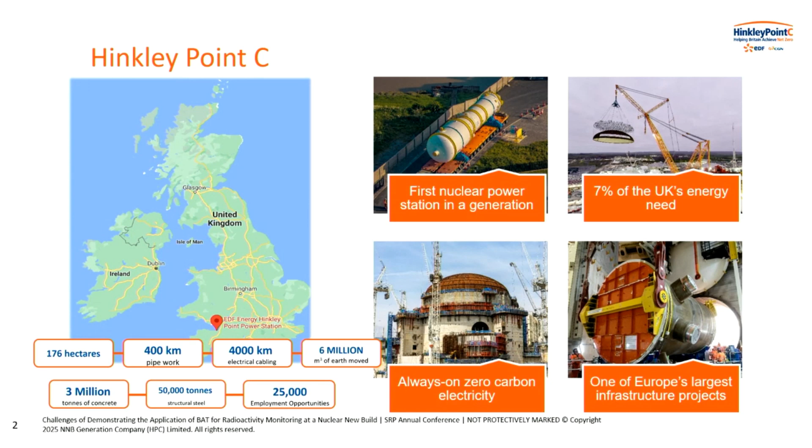So I'm hoping you can see some of the examples on the screen to try and give an idea of the scale of the project. We've also got some recent images, including the installation of the first civil reactor pressure vessel in over 30 years, just highlighting some of the quite remarkable progress that's been made to date.

Thanks, Stefan. As an environmental professional, one of the things I love talking about - and I appreciate I'm probably preaching to the converted here - is just to recognise, and it's built into the poster that's going to be downstairs as well, the carbon costs and things like that.

That's not to say we don't need those other renewable sources as well, but I have to be honest, it kind of gets my goat a little bit where all we hear about is renewables as being the answer to low carbon. It's not. Nuclear has a really important role to play within that.

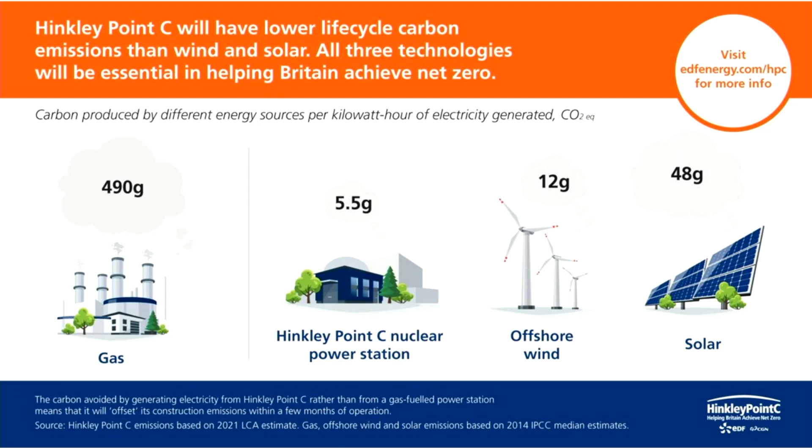Okay, so before we get into the bulk of the presentation, I just want to provide a little bit of context on best available techniques, or BAT. I'm aware this will be familiar to a lot of you, but maybe just as a reminder - there's a legal requirement in the Environmental Permitting Regulations for all exposures of ionising radiation to the public as a result of radioactive waste disposals to be kept ALARA, considering social and economic factors. But if you're going to dispose of radioactive waste, you need your RSR permit, and that has within it specific conditions to address that BAT requirement, including on the topic of monitoring.

So when we say 'best', at a high level we mean most effective at providing a high level of protection of the environment. In terms of 'available', we really mean developed and accessible under economically and technically viable conditions. And when we talk about 'techniques', we're not just talking about technology, but also the design, the operational methods, and the management systems. So if something is considered to represent BAT, environmental optimisation is being achieved, and implementing further techniques could lead to being grossly disproportionate.

So that's BAT. In terms of radioactivity monitoring at a nuclear power station, there are three types from an environmental RP perspective that I want to talk about. That's in-process monitoring - your real-time or near real-time monitoring of the levels of radiation during operations.

As a new build project, we went through a generic design assessment process. We were fortunate in that we had a reference plant, Flamanville 3, our sister plant out in France. I appreciate for those involved in SMRs, you may not have that - there's always these kind of different challenges.

But we were building the EPR on an evolutionary design based on French OPEX, but then having to align that to UK requirements, but within a local site context.

For example, things like our reference plant has a 98-metre stack because there's a big cliff behind the site and they need to make sure they've got adequate dispersion. We don't have those situations at Hinkley, so suddenly we're now looking at a shorter stack height because of kind of planning considerations and visual impact.

We then need to look at realigning all of the sampling arrays within that stack to make sure we've got appropriate and representative samples. And there you're trying to balance across the varying, conflicting, competing requirements of various codes and standards, making sure you have sample lines as short as possible, whilst maintaining you're taking a sample from a representative location and having your instruments at a safe and secure location which are easy to access. And those do conflict, and those don't always kind of align neatly.

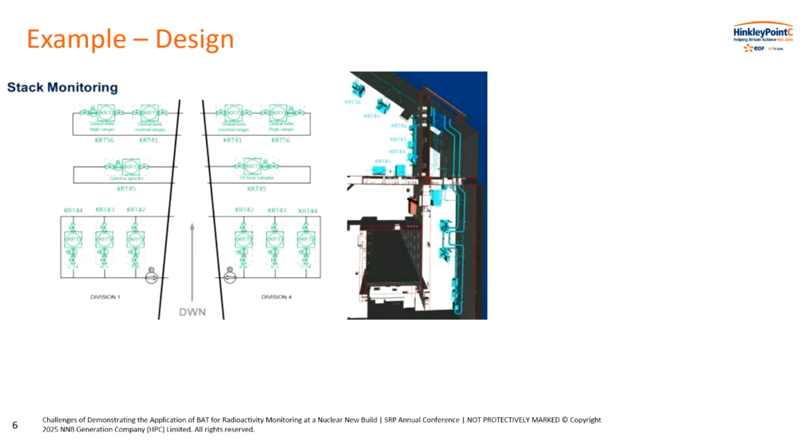Making sure that we've got duplicate sampling systems as well - you see here we've got two separate sampling lines. We did have a challenge during GDA about whether we should have a third separate line for regulatory compliance sampling. But there were challenges around how do you maintain that, whose responsibility is it to maintain it - is it ours? But we've just got the two lines.

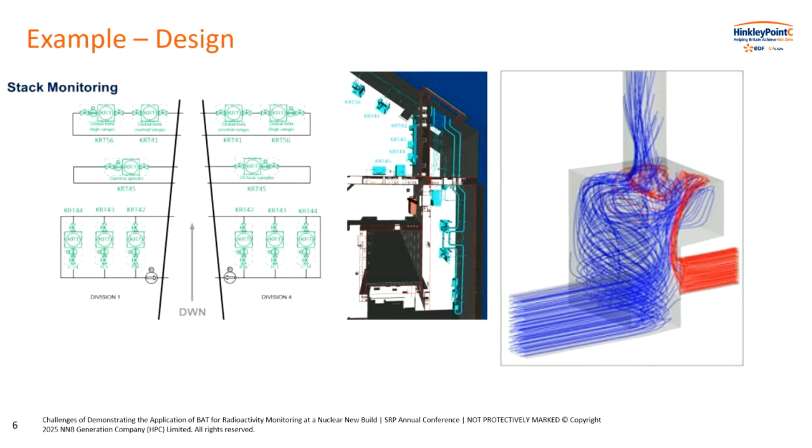Thinking about the stack height, there's loads of changes that happen during the design process. So looking at computational fluid dynamics to make sure we understand the flows that go through that plenum into the stack, looking at what that means as you go up through the stack - where are we going to be taking samples, what are the right heights. And with all these things, there's never a lovely inflection point on the graph where it's easy to choose - you're having to make these kind of engineering judgments.

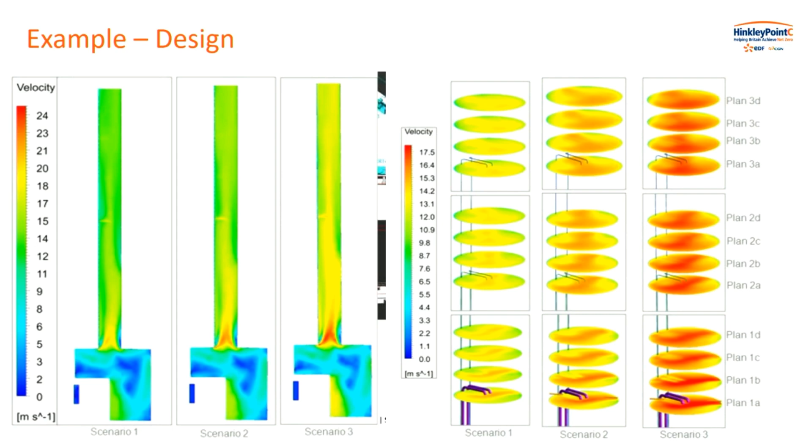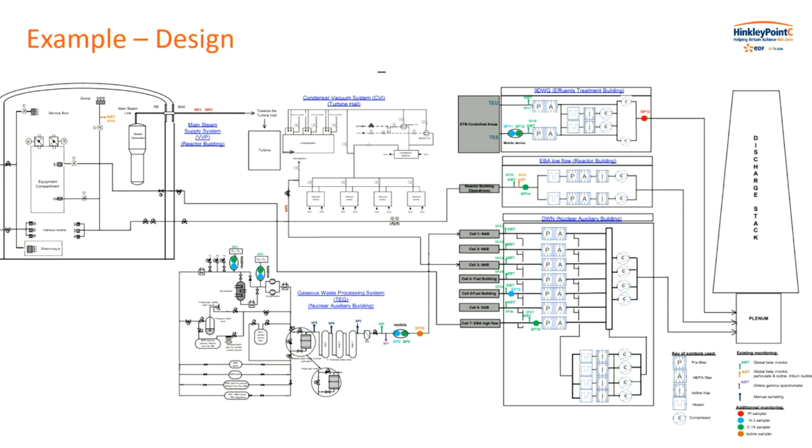When we think about it in terms of the entirety of the plant, stack sampling is actually relatively straightforward, relatively well known and understood. We're actually in a position where we had to demonstrate BAT across the entirety of the plant, across all of its in-process monitoring, all of its discharge monitoring at various different locations. For that, we're very much dependent upon the implementation of codes and standards, making sure that through their application we're demonstrating relevant good practice, because you've got so many other things that you need to consider.

So when it comes to thinking about how you move from a design into a procurement environment, I have to be honest, when I started on this project, I was probably quite naive in the world of procurement.

Thinking about what Stefan was saying in terms of what does BAT actually mean, well the A in BAT means available. I assumed that Hinkley Point C, a multi-billion-pound project, we were the biggest show in town, and people would be lining up waiting to sell us their wares. How wrong I was. To give you an indication of technical specification for our plant radiation monitoring system, about 180 detectors across the site.

Some of those are nuclear safety classified. The technical specification only runs to 119 pages. However, when you go into that one section which says references, there are 164 different references referring to codes, standards, engineering notes, internal guidance, procedures, those sorts of things. And that's one of 48 appendices of the contract.

So when I tell you that when we put this contract out we had one bidder return a bid, that may not come as a complete surprise to you. It doesn't matter how good a piece of equipment is, if that tenderer doesn't give me a compliant tender I can't award it, or even if they don't apply for it I can't give them the piece of work. It doesn't matter how good the X, Y, Z piece of equipment is - if I haven't bid for it, it isn't available. So the availability is fundamentally quite difficult and is quite a different kind of context.

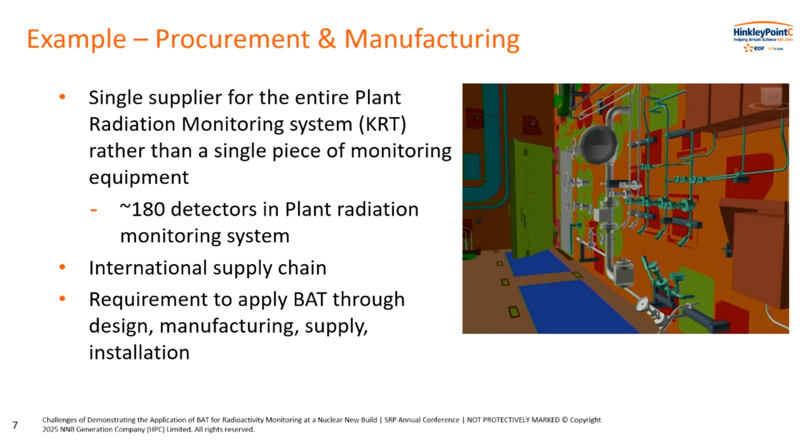Because throughout all of this we're now in the process of looking at manufacturing non-conformances, exemption requests, deviations, contract variations. So actually even our original specification that we laid out in tablets of stone, we're having to manage all of those changes as part of this and still continue to demonstrate the application of that. And I suppose the last point is then doing that installation within a complex environment where you've got loads of other challenges as well in terms of human factors and those sorts of things.

Okay, so construction then, as you'd imagine, an extremely complex phase. So unsurprisingly there's a vast number of mostly minor changes and non-conformances during that site construction. That can range from non-conforming concrete to defects on a weld on pipework, but you do need to assess the impacts of these changes and non-conformances in a proportionate way. That's the key thing - making sure that you've got that proportionality. If you gave full BAT analysis to everything, well you're not going to build anything, are you?

So it means focusing on areas of importance because you have to consider that displacement activity. If you're over there, well you can't be over there, which is probably where you need to be.

So for example, at Hinkley Point C we'll have 8 rather large discharge tanks, circa 1,000 cubic meters, so pretty big. Their primary functions are to store, provide a containment function for that effluent, but also to sample it prior to discharge to the environment. Now one of the key environmental design requirements was to have smooth internal surfaces, limit the number of internal components so you could minimize that particulate, and ensure you had representative sampling.

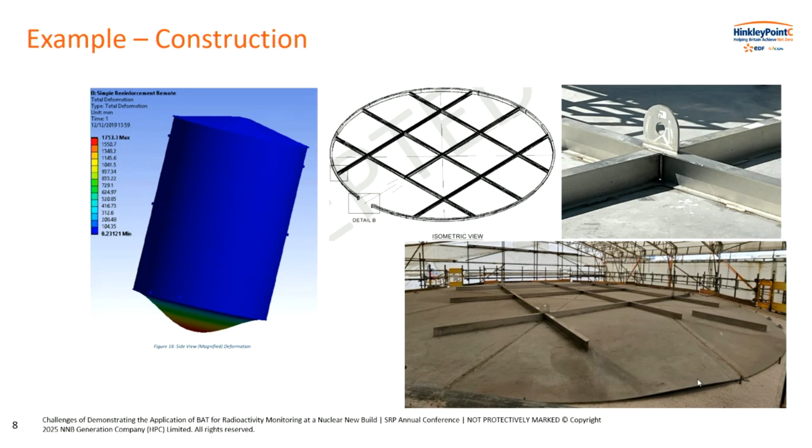I think we can all agree no one really wants that. The key thing to remember is that a tank needs to be a tank. So while we're trying to reconcile this against the environmental design requirements, fundamentally a tank needs to contain the effluent. It's also worth considering that the dose to the representative person from discharges from Hinkley Point C is about 5 microsieverts a year, about the same as a dental X-ray.

Pre-operations - I say pre-operations because Hinkley Point C isn't an operational station yet, will be soon hopefully, but the planning and development of the operational arrangements is underway. The approach we'd typically take to demonstrating that is to consider regulatory guidance, make use of the invaluable operational experience and relevant good practice from the operational fleet within the UK, but also in France.

We also consider particularly relevant sites. Hinkley Point B shares a local environment, Sizewell B has more similar reactor technology. But there are instances where UK guidance is entirely appropriate for the existing fleet, but it may not necessarily be aligned to other relevant good practice internationally.

For example, when developing our environmental monitoring programme, we were considering how we would monitor dose rates around the site boundary. UK guidance recommends the use of TLDs - it's a tried and tested, proven technology. It consists of putting a TLD in a bag and nailing it to a post.

Perhaps there are more sophisticated options out there. Well, in fact, we already had one at Hinkley Point C. The plan will be for emergency gamma plume monitoring that we would install gamma tracer detectors around the site boundary anyway. It enables live, or close to live, reading of data. They're much more secure and they've got increased data granularity.

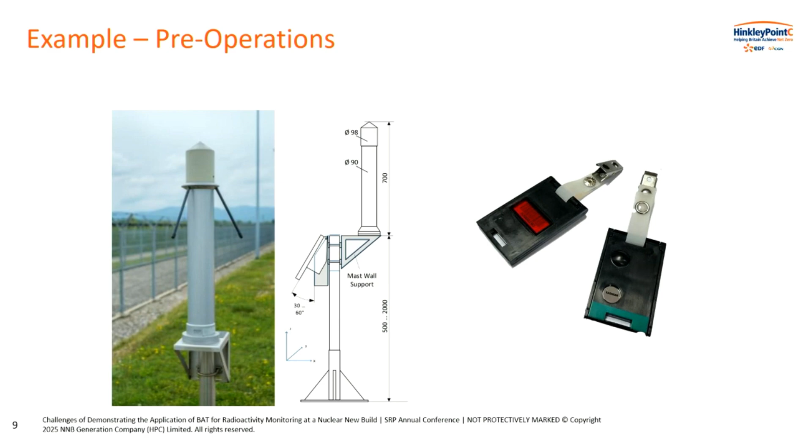Just very conscious of the time, and I've probably got about a minute to wrap up. As Stefan said, radiological impact from Hinkley Point C is very, very small. Another way to look at it is that if we were a coal-fired power station, the doses from our normal discharges of gas emissions would be higher than a nuclear power station. That's how low they are in routine operations.

We need to make sure that we're monitoring those things, but we need to make sure that our monitoring is also proportionate. So the requirement for BAT still applies, but it needs to be implemented in a proportionate way. I'm not saying our challenges are any harder than retrofitting, they're just different. It's all quite difficult, and I think the earlier presentations we saw from Sellafield in the earlier session illustrate some of the unique challenges they face, and SMRs will have the same challenges as well without a reference plant.

We've taken the view of leaning on codes and standards as being a particularly useful way of doing that and pulling on our available OPEX. But you need to be really careful about not cherry picking isolated clauses out of different standards to try and do that.

If you're following a standard, you need to make sure you're following it as holistically as possible. And there are those challenges that I say you can't just look at the design. Ultimately, BAT is about how you implement that, how you maintain that, how you manage those changes. And that's really, really crucial. To be honest, the biggest issues we've got at the moment at Hinkley is making sure that design we've so carefully pored over actually is realised in all three dimensions as it's built on site.

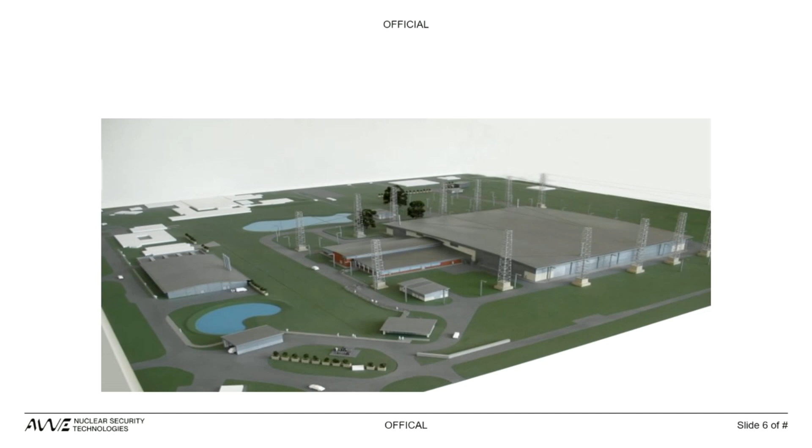Now, as time's passed, the number of projects has grown, obviously. That is a picture of the Mensa facility, which will be assembling and disassembling the weapon. That is a nice picture of the Hub, with the engineering wing, the science wing, and right at the top is the calibration facility.

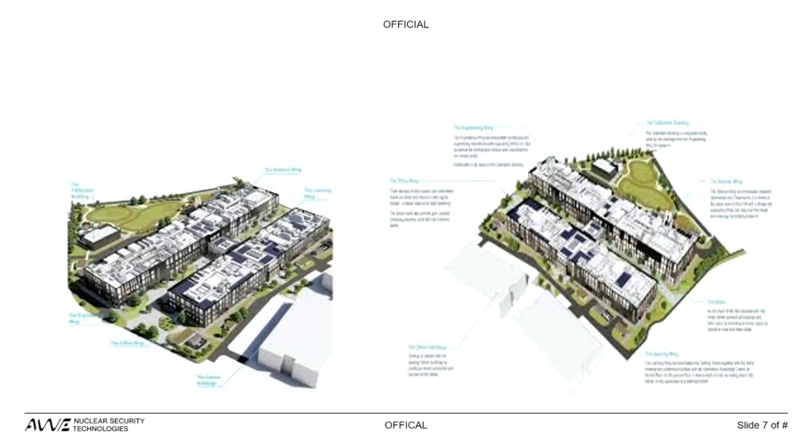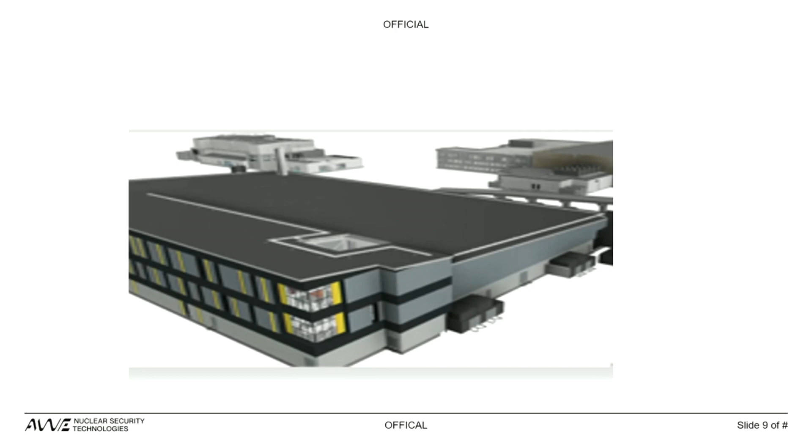In terms of the framework, we've got IRRs, REPPIR, EPR, the AWE assurance principles. We're also drawing on IAEA standards. But what we've actually set out years ago is our design safety principles, which basically says this is what we consider to be good practice for a modern standard building. So we've got a good idea of what we're going to do, nailed down in writing.

I don't know whether anybody's aware of this, but there is something called the ARC project - the Alpha Resilience Capability Project - where BAE Systems, ourselves, and Sellafield are all collaborating to try to maintain the skills, knowledge, and technology to keep alpha awareness and standards going. Because most of the industry, you could argue, deals with beta gamma emitters - it's not really, but maintaining that alpha scale, if you want to call it that, is key for the ARC project to go.

One of the things we're finding out as we go along is people are using COTS, commercial off-the-shelf equipment, and RGP as buzzwords, like 'oh, it's COTS, it's RGP' and it's like, well, hang on a sec. Drill down and try to understand what you're trying to put across, because at the end of the day you still have to demonstrate it's ALARP. Not many people can build a furnace that withstands 1,000 degrees centigrade, for example, and you can't go to Argos and get it.

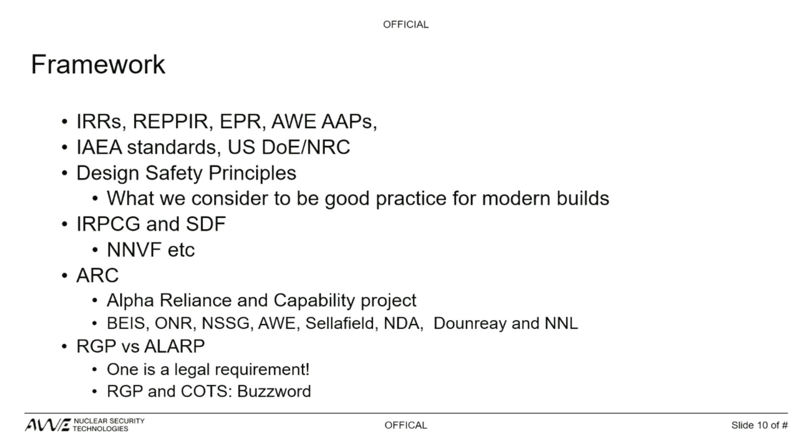As everybody's mentioned, there's a distinct age profile across AWE staff, not just ourselves, but across engineers, safety case writers, etc. One of the things we decided early on as a company is we'll use the intelligent customer approach. When our engineers have been getting involved with the design engineers, there's been some butting of heads, because they've assumed, or we've assumed, we've forgotten how to do stuff, and in reality we haven't. There's also the fact that AWE has a different safety culture and an ALARP culture. So when the guys have come down from Sellafield, they've said, 'yeah, well, that's just C4 area,' and we're going, no, we don't have that system anymore. We've stopped doing it. So there's been some education going on.

So one of the things I've got is a new build team, which is a combination of experienced people and newbies, as I call them, and I'm also getting trainee placements. The idea is that when the next generation come along, they'll know what we're doing. They'll have some experience of how we got to the place we're going, the journey that we're on. So it allows us to support the future.

Anne's doing a presentation about how we're recruiting. Basically, it's a 2-year program to become a health physicist, and approximately 3 years to become an RPA. So there's lots of placements, lots of ideas that we're trying to maintain to keep the skills capability up to address the wide variety of hazards we're dealing with.

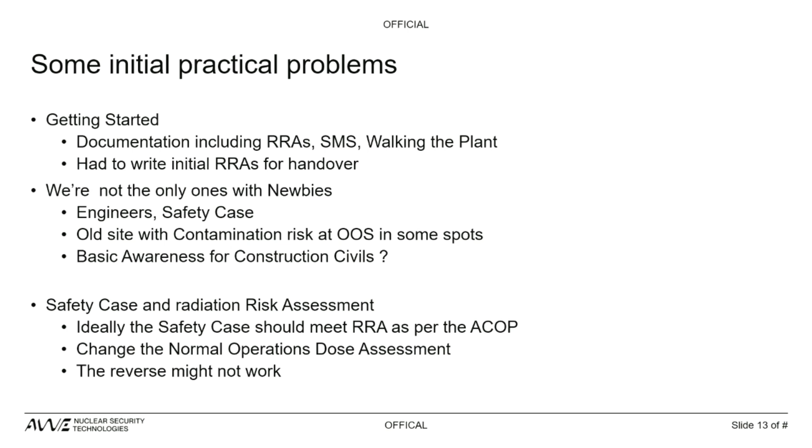So this is going to be a generational thing. A large number of people at the start of the project are going to disappear off the project. They're going to get jobs elsewhere, as we discussed earlier. So it's about capturing the ALARP arguments and the ALARP journey of how you got to where you got to, making sure the design and operation is holistic, so you can maintain the plant and decommission the facility at some point, with a plan for a through-life refit.

So, I've been given a blank piece of paper. We used to, and still do, use RPE a lot because we've got a whole historic plant where we might find contamination. But one of the aims I'm trying to do is reduce the RPE reliance.

One of the things I was thinking about when constructing this presentation was that one of our inputs into our ALARP culture is the concept of zero intakes, which helps us reduce our waste arising by applying BAT. If you're not contaminating people or the building, your waste is essentially out of scope. But unnecessary use of RPE can also be a problem, so you need to demonstrate that use of RPE is ALARP - for example, looking at the totality of the problem: heat stress and all these other issues we know about.

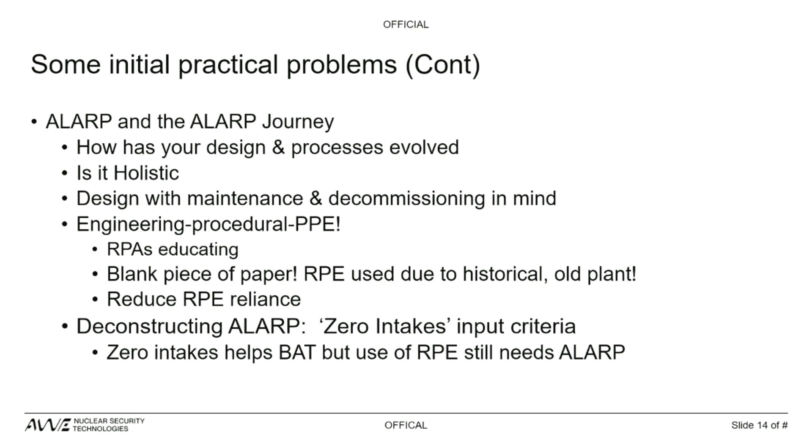Now, not many people make glove boxes, so we won't be the only company that wants them. The Americans want glove boxes. The guys at Sellafield want glove boxes. Everybody wants a glove box. And it's a single point failure.

I don't know about you guys, but I still use British Standard 4094 on X-ray and gamma shielding. Now a lot of people, like the Cerberus guys, do MCNP, MicroShield, etc. So one of the things we've got to look at is how we do the oversight, because some of the guys are extrapolating on the curves and models in those British standards using least squares fits. So one thing we might want to look at is whether we need a British Standard update.

Instrumentation is another bit of an issue, because as we're designing, instrumentation goes out of date. So one of the things our colleagues in the instrumentation section and our QPs are looking at is a configured list of instrumentation that we keep reviewing - is this still current, what's the life, how's it going to work, is it going to fall over? They're doing a lot of good work for us to try and keep things happening.

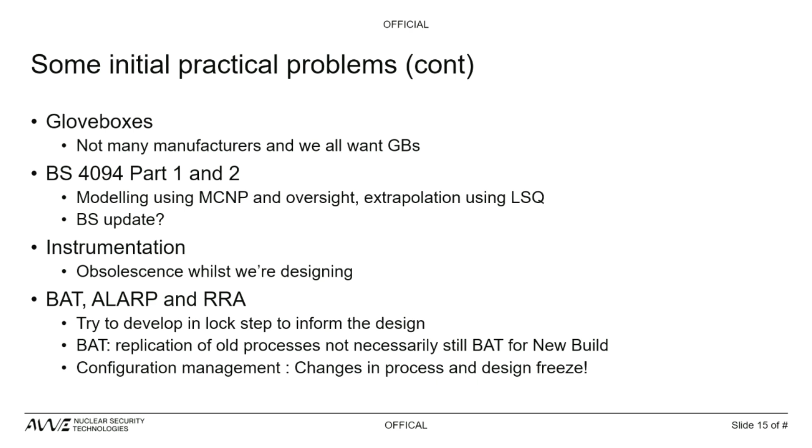One of the fun things about working with the AWE scientific community is, as they keep saying, the science always evolves. So for various buildings, we're going to give people a design envelope to allow for scientific changes, because it has been a bit irritating when people turn around and say, 'John, we want to change this little bit of a process,' and I'm saying, 'No, hang on - we're trying to build something. Let's have something called design freeze where we can actually build the things we're trying to build.'

Done a lot of discussions, and I did a presentation to the IMechE on how we vent systems and things like that.

One of the things we've been working with the RPAs on is, could we come up with a simple standard for air sampling? For example, a gentleman named Stuart Fannin many years ago came up with a model using very complicated mathematics to say, what about one sample near a containment less than a metre away? So you could do that.

Now, having had discussions with engineers, one of the things they've been looking at is use of computational fluid dynamics, because you can use computer programs to model the airflows. But it's prone to what the Americans call garbage in, garbage out. So if you put a mistake in while doing the model, you won't get the right model.

So one of the things we're looking for is doing it in a practical way, saying, right, we'll round up our RPAs, vent engineers, the safety case guys, the qualified person, facility management representatives, and go, right, this is where we want the cams to go. Basically doing it practically, we think the airflows are going to be here.

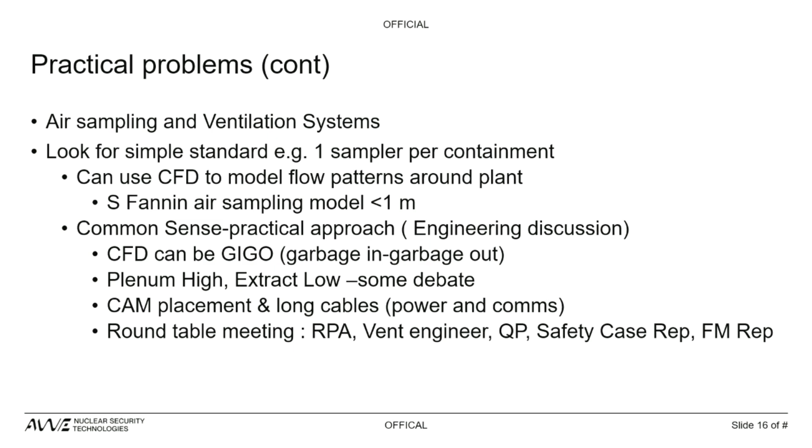Now, we've moved away from paper, which is a good thing in a way. So a lot of the builds are using 3D drawings and model walkthroughs during the layout. And slowly people are actually using virtual reality to look at how these buildings will operate.

But one of the ideas I had was, well, what about a sim facility where you have sim surveyors monitoring sim plant, sim maintainers maintaining the plant? You could have a computer program like SimCity, but you can trial stuff to see if it is maintainable.

Here's some examples of what we're trying to do. Now, some of the things AWE has decided to do is we will try stuff. If it doesn't work, at least we've demonstrated it doesn't work.

So I did some modelling and calculations. I found 4 centimetres will give about a factor of 2 dose reduction, which based on the ALARP argument I was generating was about all I need. We took the final design through MCNP modelling, which gave good agreement.

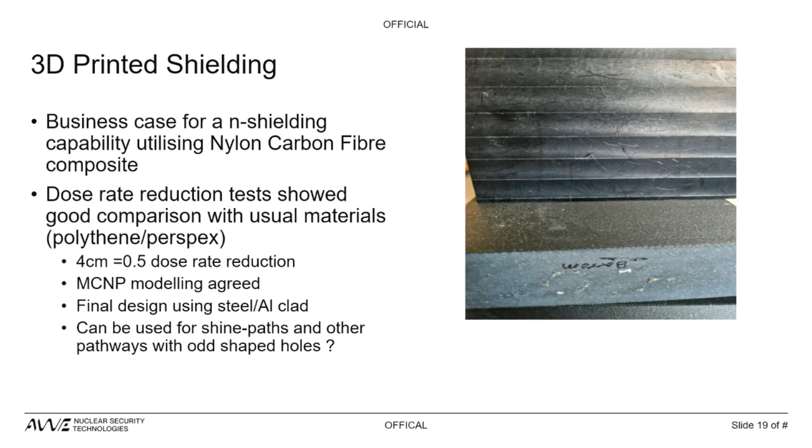And one of the things in discussion with various people is, well, if you can do 3D printing for metals and plastics and things like that, you could use it to plug odd-shaped holes in things like radiography facilities and all these other good things, rather than just put a big piece of wood over the top of it.

Now, many years ago, I was working on obsolescence with our QP. One of the things we said was, wouldn't it be great if we could have the CAMs and the criticality detection system linked up to various locations around site so we could look at data in real time from the facilities? As time passes, our new instrumentation will be smarter, so it will know where it is and plug into building management systems.

My colleague Graham Old bumped into me and said, I've had a chat with our QP, Trevor Burkett. What we think we can do is link the CAMs to CIDS to laptops, because since COVID we've all been given a laptop each. So one of the things we could do is, while you're in the office and there's a problem in your facility, look it up and you're already looking at the problem rather than going to the facility.

Now, many years ago again, some gentlemen asked me to... one of the things we've been looking at is UV to see if we can detect box holdup.

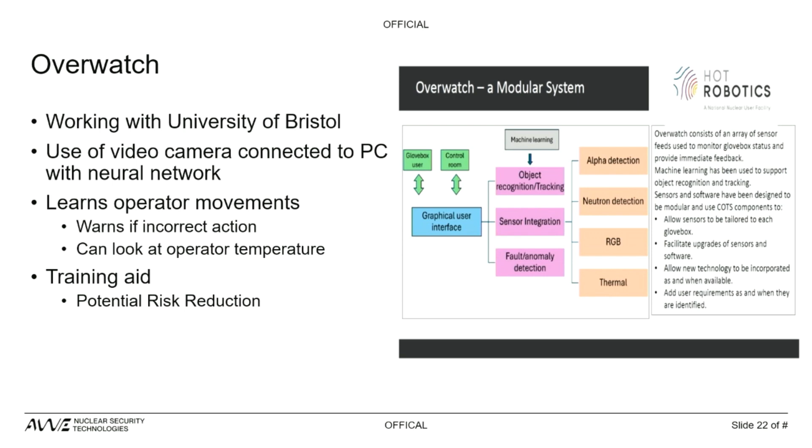Thanks for everybody getting involved, and for everybody I forgot from the list - for example, Daniel West for teaching all the engineers that depleted uranium is actually radioactive, and the guys at Cerberus for doing some shielding calcs for us. Thank you very much.

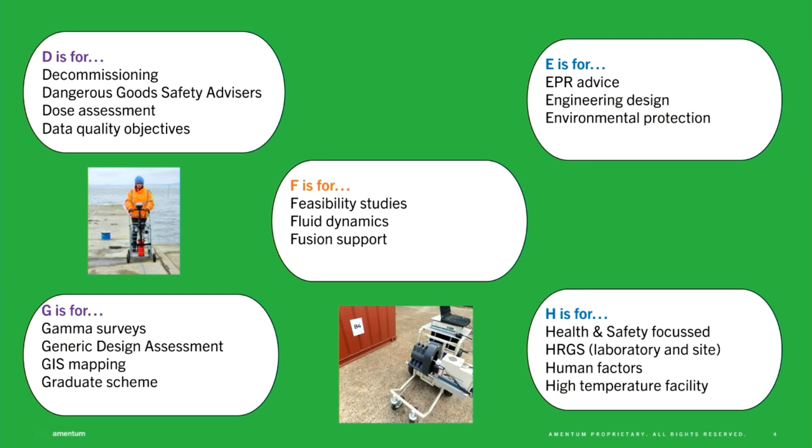We're very health and safety focused. We have high resolution gamma spectrometers in both our laboratory and out on site. We do human factors work, and we have a high temperature facility. We do lots of innovation, I hope. We've got a lot of instrumentation. We do IRR 17 advice, and we've got an irradiation facility in Harwell.

We used to be called Jacobs, our most previous name, which might be more familiar. K was quite hard - we've got lots of knowledge at expert level, and our team does like a Krispy Kreme donut. We've got low resolution gamma spectrometry systems as well - it's a picture of one that we had on site there. We do leak sealing, mathematical modelling - these are some of the codes for the ANSWERS suite.

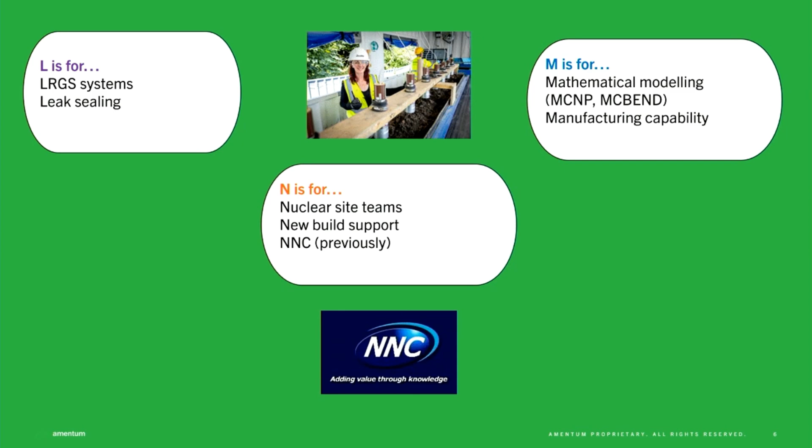We've got manufacturing capability, we've got nuclear site teams. We do new build support. We were previously called NNC. We've got offices in lots of locations. We do project management, problem solving, and we offer personal development. We do, I hope, quality work.

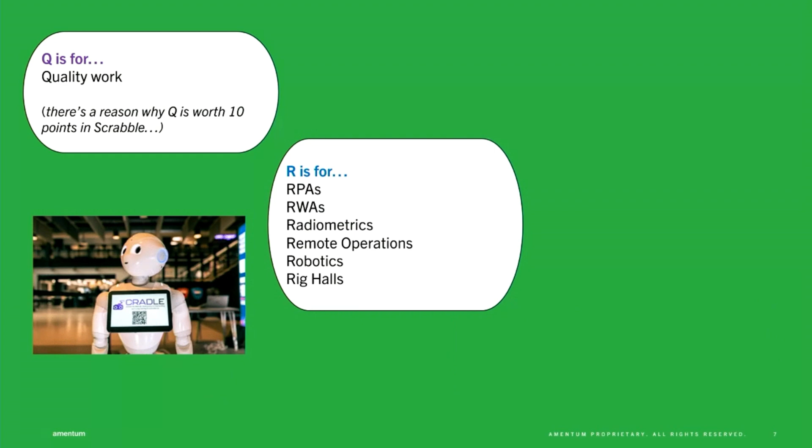R was a bit easier. We've got RPAs, RWAs, we do radiometrics, remote operations, robotics, and we've got some rig halls. We do safety case work, a lot of site work, and we've got SIAL, which is used for waste immobilisation. I'd like to think we've got a lot of talent and we're really good at teamwork. We offer training courses, and I've been there for 21 years.

We've got a UKAS accredited laboratory. We do a great variety of work, including visual sample planning. We were previously called Wood Nuclear. We offer waste management, and we can facilitate workshops. We are X-ray experts, hopefully.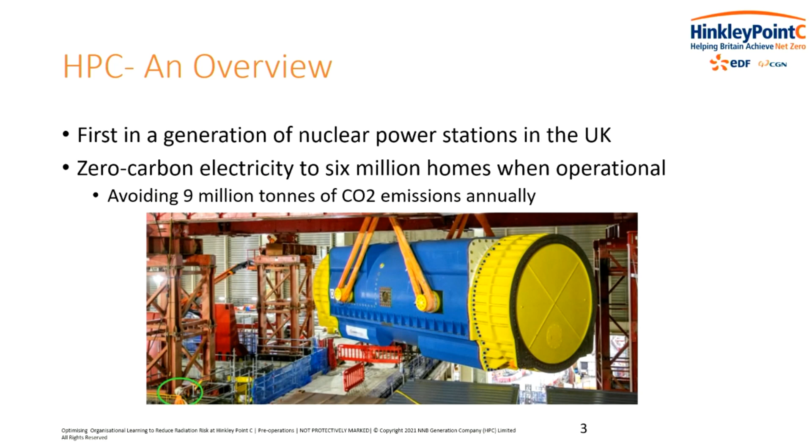Before we discuss organisational learning, we'll give you a brief overview of the project itself. As you're probably aware, it's the first new nuclear power station to be built in the UK for around 30 years. It will generate a huge amount of low carbon energy once the site is operational. For a bit of scale, the picture here is the world's largest electricity generator being lifted into place. Please note the worker in the green circle for scale.

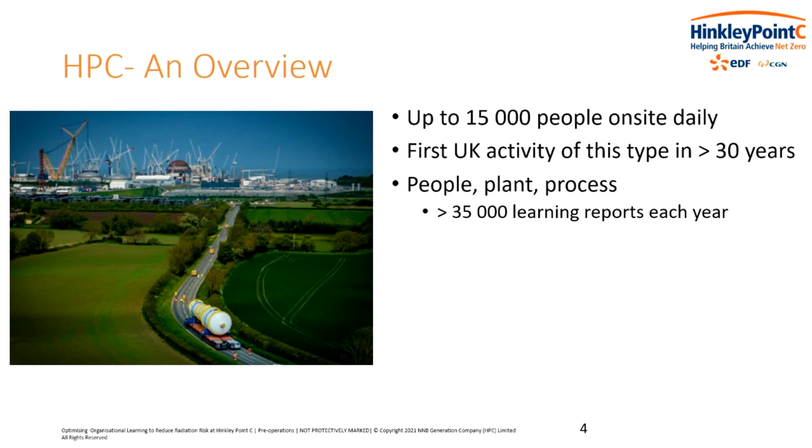I'm going to hand over to Sean now, and he's going to tell you a bit about how we plan on ensuring that we're capturing this prior knowledge. Cool, thanks Paul. So, hi everyone. I'm just going to give you a bit of an overview of what organisational learning is and how we're doing that at Hinkley Point C.

One of the biggest challenges that we face is this is a future operational hazard. We currently don't know how to deal with those hazards, but we can look at our design specifications, we can look at regulatory requirements, but we can also look at what have our sister stations in the fleet done while they've been operating, what have the other EPRs across the board been doing.

The challenges we face are very unique. We're trying to build the first in a generation of a nuclear reactor, and we can't do that without looking at what has industry done already.

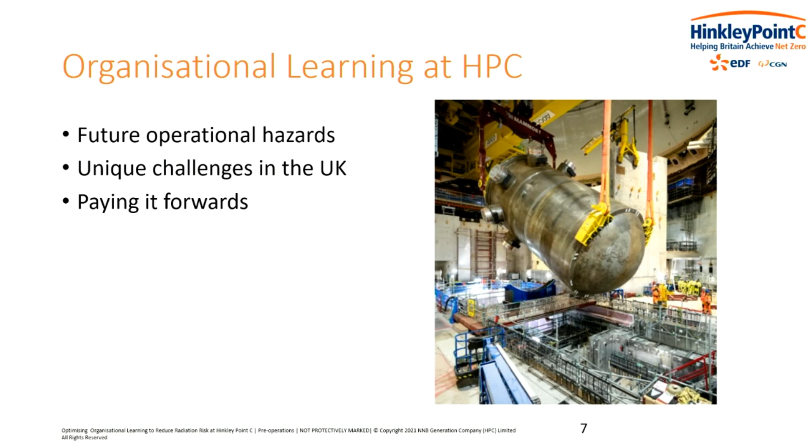However, this isn't just take. We're very aware that this is given as well. Sizewell C has got spades in the ground at the moment. There's SMRs that are looking to come online in the near future. We also want to make sure that we can set a good foundation to pay it forwards, tying into the theme of regeneration and sustainability.

So, what actually is organisational learning? It's not a lot more than knowledge management. And knowledge management is split into three main parts. Firstly is capturing information. That can be done in a variety of ways, and they all feed into this big mess thing called organisational learning that's quite hard to define, actually.

Just as an example of a few of them, we've got operational experience. So for us, we've got lots of industrial radiography happening on site, so we're in a position where we can look at what's happening there and how can we learn to improve when we come into operations. But we've also got the experiences of others. As I've just said, we can look at the fleet. What issues have they had and what can we do to improve and learn from them? I think that's international reporting too, so we're also looking at WANO, SOERs and other references to be able to learn.

The next part of it is taking action. There's no point in taking on that knowledge if you take no action on it. So what we've got at Hinkley Point C at the moment is a company reporting tool called Insight. There are various things that we can report. That could be from learning something new at a conference like this. It could also be observing a non-conformance where we want to take action to improve in the future.

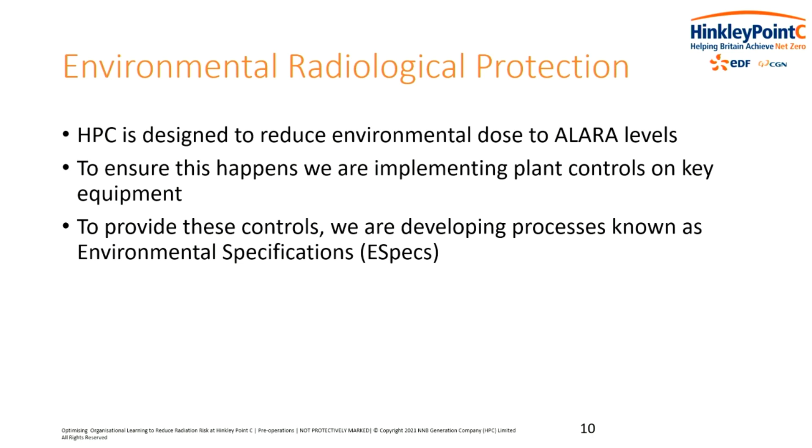To provide these controls, we're developing environmental specifications known as E-specs for key areas of the plant to, in effect, bridge this gap between design and day-to-day operation.

So what are E-specs? Well, they're instructions for the operators of HPC, directing them to operate the plant in a manner that minimises our impact on the environment. They define actions that we must follow, such as appropriate return to service times when key equipment breaks, and maximum allowable activity concentrations in our discharges.

Each E-spec is formed of a specification used by operational staff, which provides the requirements, and a justification document which is used by subject matter experts and provides the technical underpinnings of each requirement, promoting the application of BAT. The overall goal is to protect the environment and generate energy sustainably.

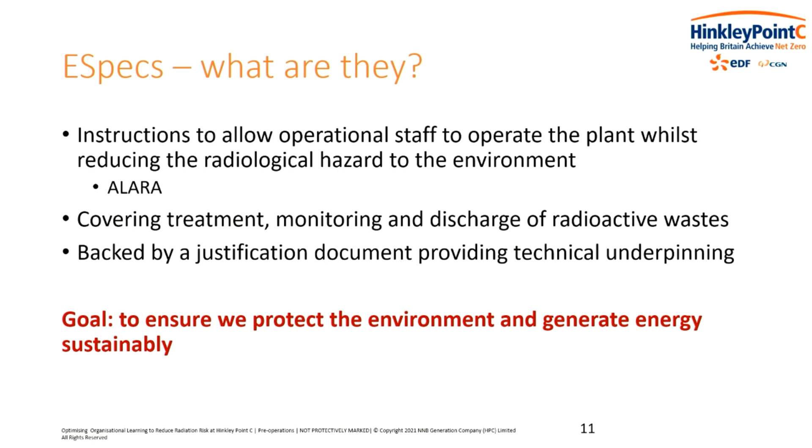So, what are the key requirements? E-specs need to be technically sound. We need to minimise dose and comply with our permits. And we also need to protect our often expensive equipment from unnecessary damage, which is of vital importance given that we have a design life of a minimum 60 years with no planned replacement for some of our key environmental protective equipment. E-specs will also need to be usable and understandable.

These documents will be used by people who might not be specialists, but who will be on the front line making decisions that can impact our environmental dose. And these are two very different challenges, but we are using organisational learning to address both of them.

To give you a bit of an idea of the journey we're on, this is a process we've followed so far. For the E-specs, we've allowed two full organisational learning cycles so far, beginning with gathering information from a range of sources and then developing our process. In 2023, we produced revision 1 of all of our E-specs.

Then early last year, we used review feedback to develop a list of open points to inform future improvements. We then closed out our first learning cycle and started the next one by working through some of these open points. We used technical workshops, a bit of data gathering, including OPEX, and optimised the process structure and templates, which were issued at the end of last year.

We've still got quite a few open points that need to be answered, and we're aiming to do this as we produce revision 2 of the documents, which will close out our second cycle of organisational learning in the process. We'll carry on repeating this all the way up to the big switch on and beyond.

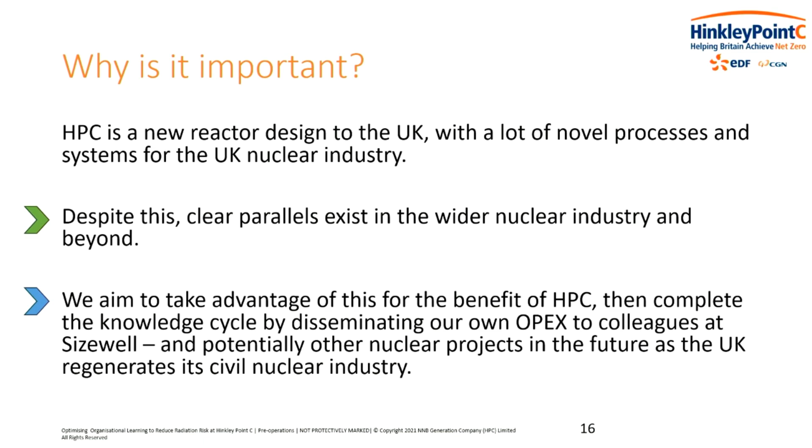And I just want to have a bit of a note on our second objective regarding usability. We've held a lot of workshops on this topic, incorporating a wide range of stakeholders and diverse perspectives to achieve a best fit for the E-specs. And we also attend workshops aimed at promoting standardisation that are run by other teams. That's a really, really useful source of information for our process.

I just wanted to also give a bit of recognition to the importance of diverse perspectives. A key question that we get asked is, well, how do we verify that all of this learning has made its way back into our documents? Well, we do this through review by people with a diverse range of technical backgrounds and experiences. It's a really strong test of usability and understandability.

This slide just lists some of the different roles held by people who've reviewed the HPC E-specs so far. Every single one of those people has brought unique skills and perspectives to our process.

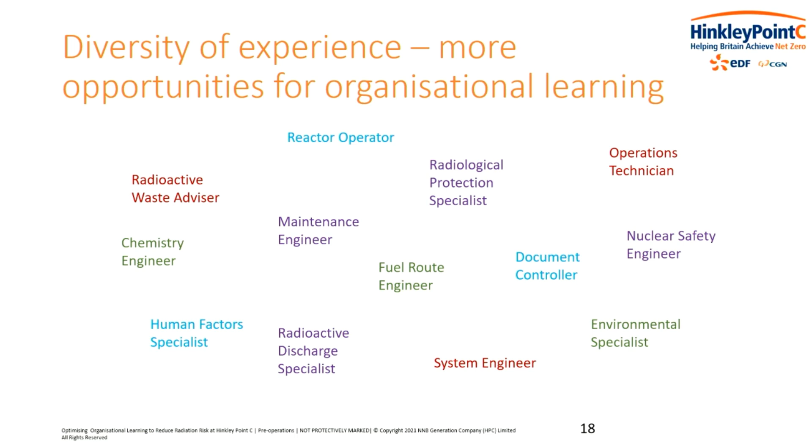I'm now going to hand back to Sean, who's going to talk a bit more about occupational rad protection.

Cool, thank you. Yeah, so we had a bit about environment there. I'm going to move on to occupational rad protection. So we've got future operational hazards. Like I said before, we've got industrial radiography happening on site, but the context is completely different in the future. So what are those? Well, we've got our design drawings, but we don't fully know what they are, so we've got to rely on organisational learning to help us get there.

Part of what we need to do is obviously keeping our people safe. We're trying to restrict their exposure to radiation. In order to do that, we've written a series of radiological safety rules. The purpose of those is to interpret IRR 17 into a way that's in the context of Hinkley Point C for us to be able to implement our legal requirements. And to implement those, there's two areas: there's the operational arrangements, so that's all our documentation that tells us how to write risk assessments, for example, and it's all of our equipment as well, so our instrumentation - that's our plant and process.

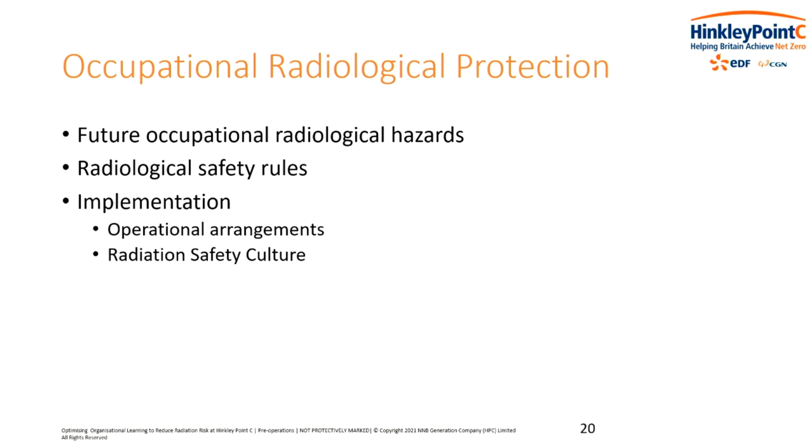But in terms of our people, we're trying to develop early on a strong radiation safety culture. And if we've got a strong radiation safety culture, we'll have nice, happy workers like our young apprentice Danny here.

So when I first took on the task of trying to develop and implement a strong radiation safety culture early on, I actually found it a really abstract, conceptual topic that was really difficult to define. It's not tangible, it's not something that's easy to measure. In order to get over that first step of trying to figure out what it is, I undertook a literature review, and from there there's two things I just wanted to share with you.

And then secondly, which I found quite interesting, radiation safety culture resonates better with the workforce at the coalface than radiological protection safety culture. The reason I wanted to highlight that is just to give a highlight to the power of language and the importance of communication. If we don't communicate to people properly, we're not going to be able to get buy-in to what we're trying to achieve.

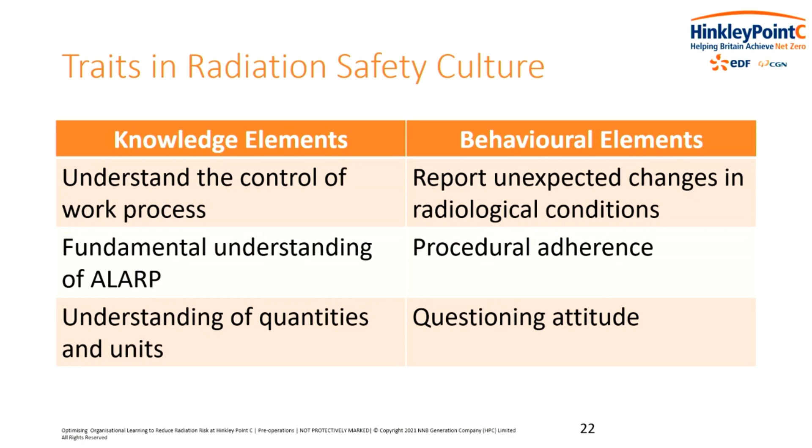That will enable them to display the correct behaviours to manage their own and their colleagues' dose exposures, but also behavioural elements - we want to foster people to have a questioning attitude, we want them to be able to learn from what they see.

The next steps that I took - I undertook some benchmarking against the operational stations, and I just wanted to share a few things I learned and included in a report I wrote on this. Within the RP team, we need to focus on our own culture. One of the things we need to do is have visible leadership. We can't be seen as sitting in an ivory tower saying 'Thou shalt not' - we need to be on the shop floor, setting the example and influencing others' behaviours.

The second one is administrative controls. Something I've observed while I've been in the industry is I often feel like administrative controls are just there purely for compliance, and the safety benefit is not often demonstrable to the people you're expecting to follow those procedures. To get people to follow procedures properly, we really need to have that procedure demonstrating why it's important. The next one is training.

Obviously, we'll be involved in the development of training as the subject matter experts, but it's also the involvement in the delivery of that training. We want to be able to network with people early on, demonstrate that we're approachable, and form those relationships.

Then the next thing is the transient workforce. During the current phase, we've got lots of people from lots of different backgrounds. As we move into the operational phase, we're going to have outages where we've got people that have worked in all sorts of different countries and different environments. We need to make sure that we tailor and target training towards the individual people and their individual needs.

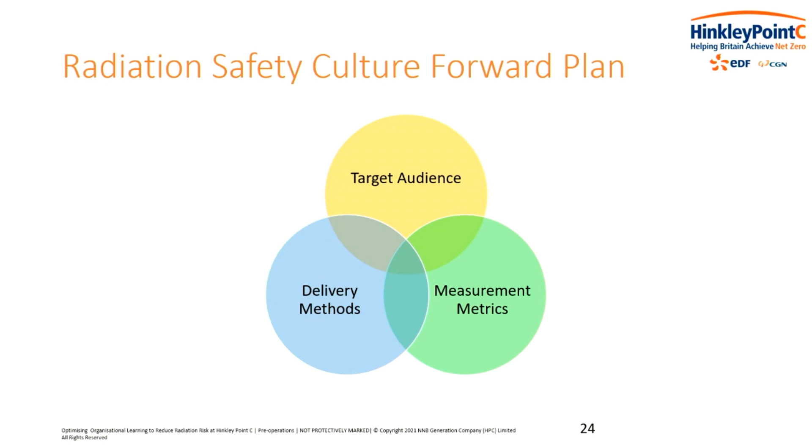We're going to achieve that by recording events inside the system that I mentioned earlier, and we can do trends of things like personal contamination events. If we see a sustained trend in something, that might be a little red flag to us to investigate what the culture is like at the moment. Is there anything we can do to improve behaviours?

And for the delivery of this, I authored a company document. The purpose of that was to be able to share what I learned to people that would be interested as we approach operations.

I started a program of apprentice OPEX sessions. This is just my personal view on this. I find that we often talk about the high level, understandably, the high level OPEX, the operational experience for things like Chernobyl or 3 Mile Island. It's really important to understand that nuclear safety culture. But I feel like we seldom discuss things like what do you do when you lose a source, or what do you do when you've got a personal contamination event.

So they've been going really well. And Danny from earlier gave that a big old thumbs up. He was happy with that. And we've developed a radiation safety culture program that we're going to try and implement over the next few years that you can see along the bottom.

But it's important for us not to rest on our laurels and just develop those things and move on. We need to have a review cycle. We need to make sure we come back to it, have a peer review, and make sure that we're still where we need to be.

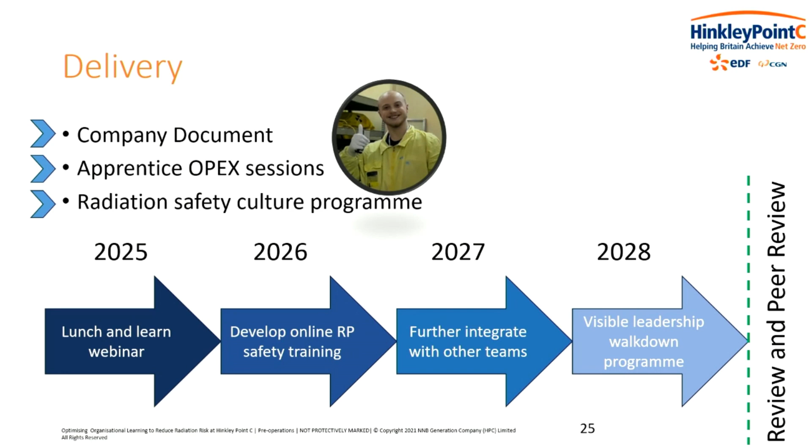So the benefits of a positive radiation safety culture. A lot of the academic research through the SRP that I found, the 3 things feeding from it are really important to the theme of this conference about sustainability and regeneration. There'll be a reduction in longer term costs, which comes from things like reduced events meaning reduced regulatory interaction. There'll be an increase in productivity and performance.

That comes from people feeling involved in a process and like their voices are heard. They're bought into what we're trying to achieve. And then encouraging that organisational learning will help that review cycle continue. That will help us feed into our net zero mission as one of many different cogs.

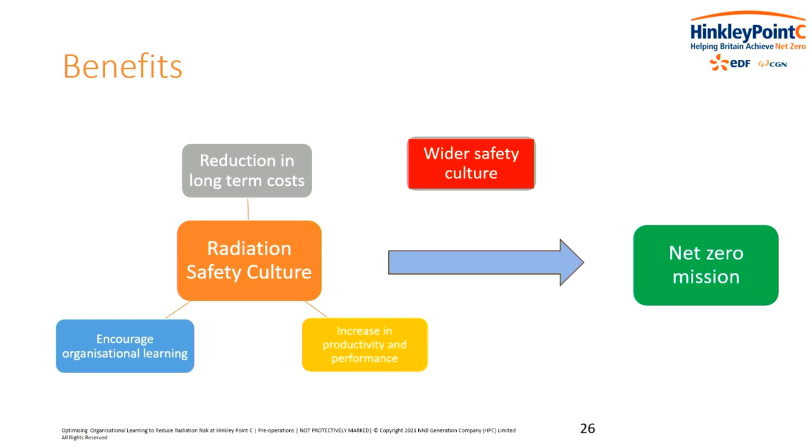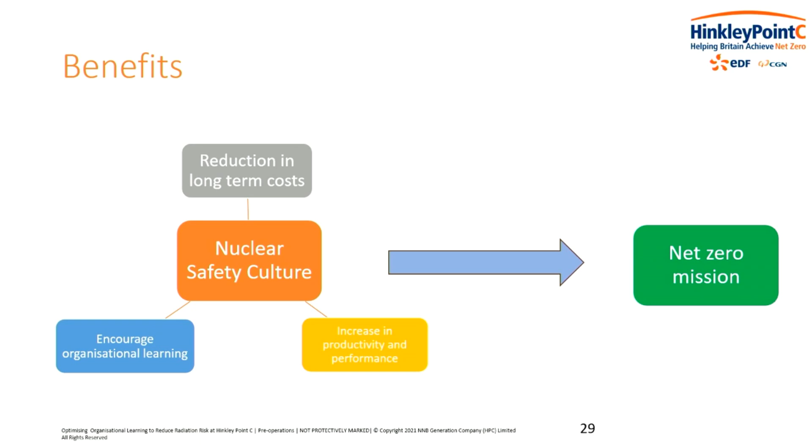However, I was cognizant that this hasn't been done alone. There's a wider safety culture - for example, environment safety culture, quality safety culture, and the bigger nuclear safety culture. We're not working in silo on this. We're trying to work together so that we're not reinventing the wheel.

I'm going to hand back to Paul to conclude.